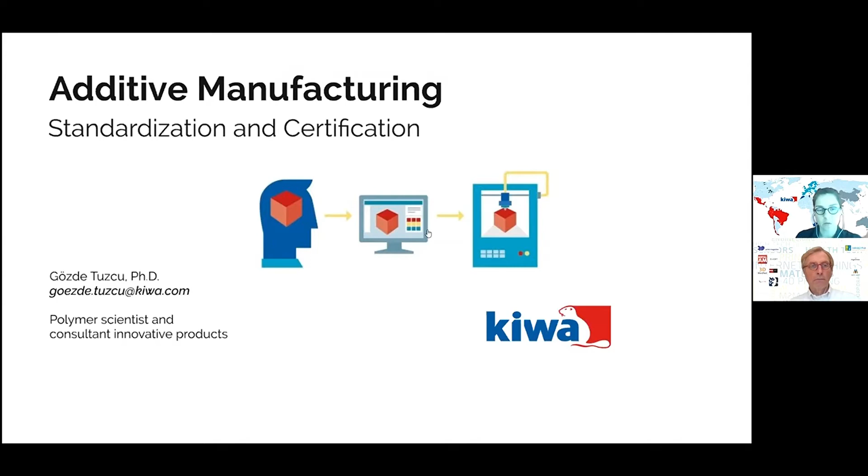I'm Gözde Tuzcu. I have a background in material science. I did a PhD at the Technical University of Eindhoven on thermoplastic elastomers, and then I started working as a consultant and also as an expert for certification at Kiwa. We are located in Rijswijk, and today I will mainly start with standardization and continuous certification. So first of all, I will tell you about our company.

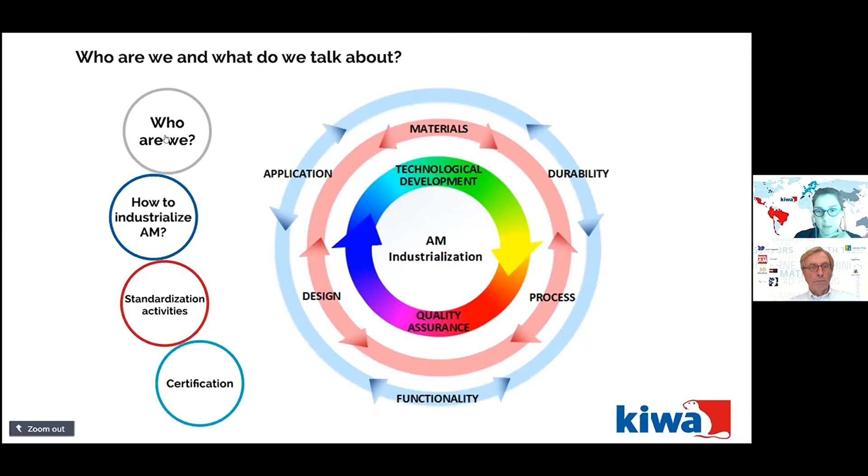We have technical committees, and we follow up the committees for standardization. We write guidelines, but we also do research and training. We are basically active in those areas.

That is also in the background. I look like a weather news presenter, but okay.

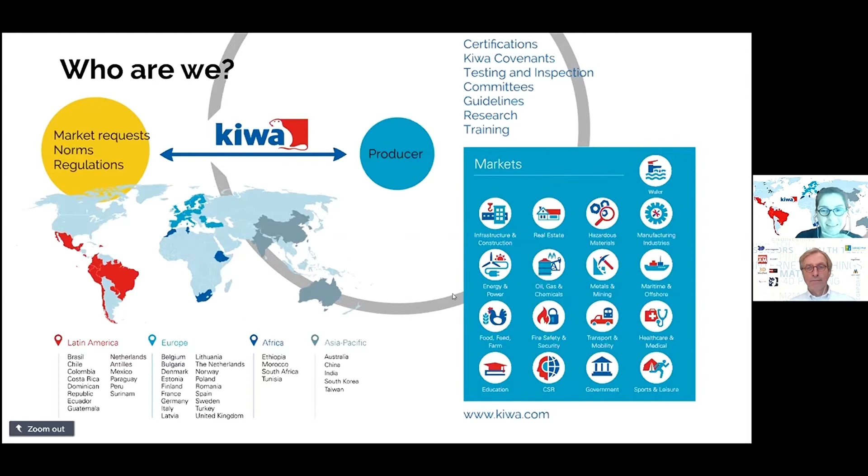So I will continue with the activities in standardization. In the ISO committee, this is ISO TC261. They are collaborating with ASTM F42, and EN is following those two and generally adopting the norms as EN norms. So I think this is one of the rare examples of a standardization committee where EN, ISO, and ASTM all work together.

In the Netherlands, we have a mirror committee, NC 341107. That's the Dutch committee. We are not very many people, but we come together twice a year to discuss the activities related to standardization in the Netherlands.

In ISO, and this information I got from the ISO website, there are currently 15 published ISO standards on additive manufacturing, and 30 are still under development, with many people working together on those standards. In total there are 8 different working groups, and under these working groups there are many more joint working groups. On average, every working group has maybe 10 subgroups under it, busy writing the standards.

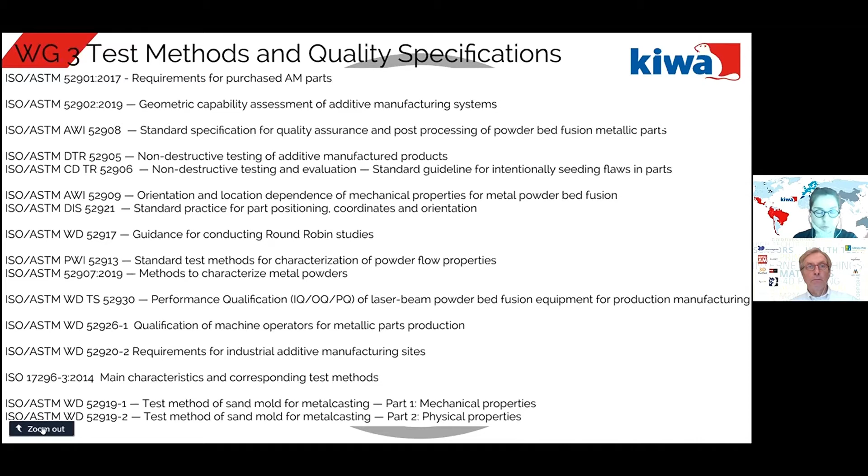I will pass this slide now, because I want to talk about different ones. Some other working groups, for example environmental health and safety, are busy with the safety aspects of 3D printing, the safety of the machines or of the personnel. There are very interesting discussions going on during the committee meetings. Another group is work group 10, writing standards specific to aerospace applications.

Especially there is so much demand from aviation, from civil aviation, that they want to use 3D printed parts to lower the costs as well, but the quality and the safety of the parts are always very important. So they want to write some specifications or requirements for the parts in those kinds of applications.

Surgical implant applications, for example, are also one of the most important applications where 3D printing is used. But because it's a medical application, and especially an implant which is used in the body, there are also many requirements to make them applicable in the market.

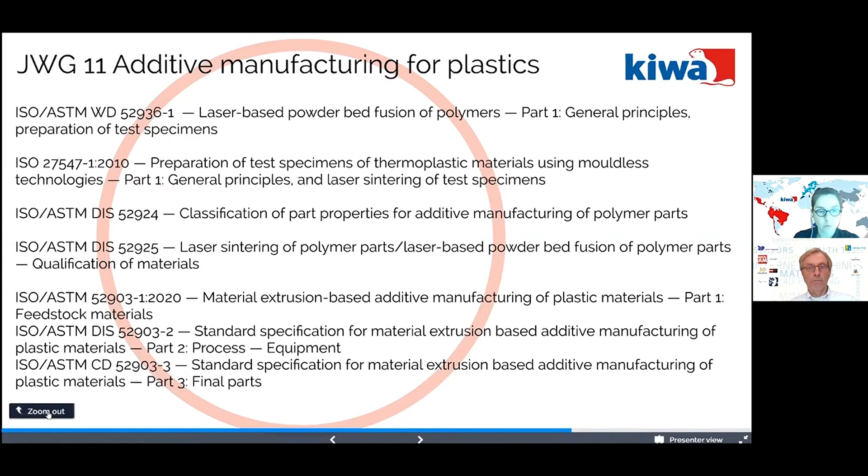So I will also go out from this slide, and I think this is all for the standards part that I want to tell. They are busy with many things and many standards, and experts and other stakeholders and related people are always welcome to get into action in these standards, also with new working items. That's what I wanted to say from the standardization point of view.

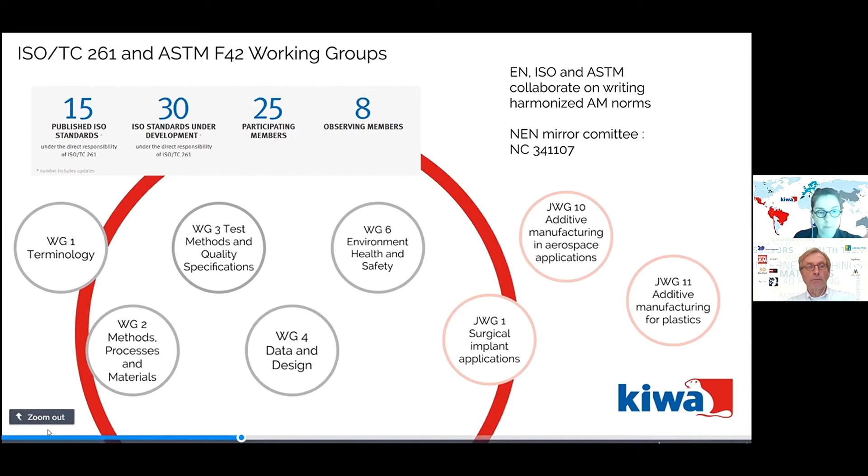And from the certification point of view, when you have the standards as a tool to assess or improve the market acceptance of the products, certification is a tool to independently assess the quality or the safety of the product, to go further for the market acceptance of the products or processes, and to improve the effectiveness of communication between companies, to make a common language among all of the producers and the users, and to make things a bit faster and more efficient, in my opinion.

And especially in the outbreak, we see that 3D printing is a very important tool to answer the needs of the situation, but there were limitations from the safety point of view, or from the quality or functionality point of view, to prove that the product really serves what it is doing. So as Kiwa, we try to fill this gap.

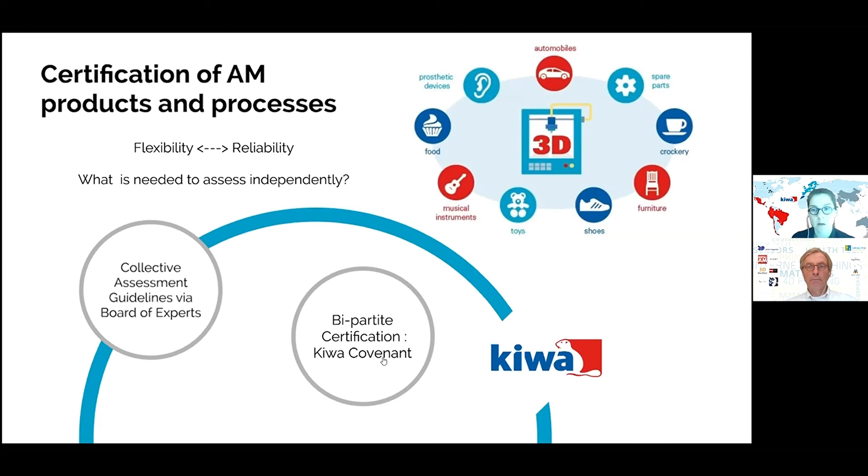We see that this is much more relevant, because there are so many different types of techniques and so many different types of applications. Writing a collective guideline is generally much more work than its purpose, or the level of additive manufacturing is not yet there to have that kind of big production and wide applications to have a collective guideline for multiple people. So that's why we are mostly working on the bipartite covenants.

I want to go a bit into detail of what is possible. This is also very parallel to the work in ISO, because there are so many specifications on the process, on persons that are busy with additive manufacturing, and some aspects. These can all be certified as well. So there are many different contents of certification, and many different ways of writing it, from a requirement point of view or a specification point of view, and that's how we are trying to help companies get into the market from a more safe and reliable point of view.